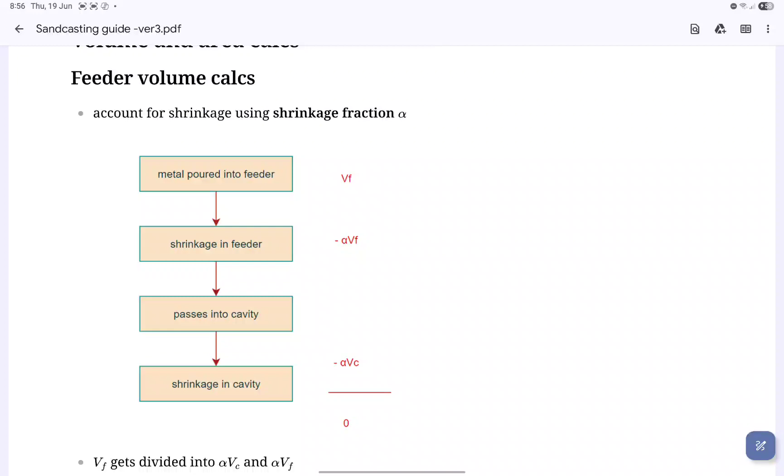What we have is that the entirety of our feeder volume is being divided into two things, right? The amount that is wasted here is by being shrunk. That volume we can never get back, okay? That's just life. That's the way it is. But the rest will be whatever is left over here times the shrinkage, so minus alpha VC.

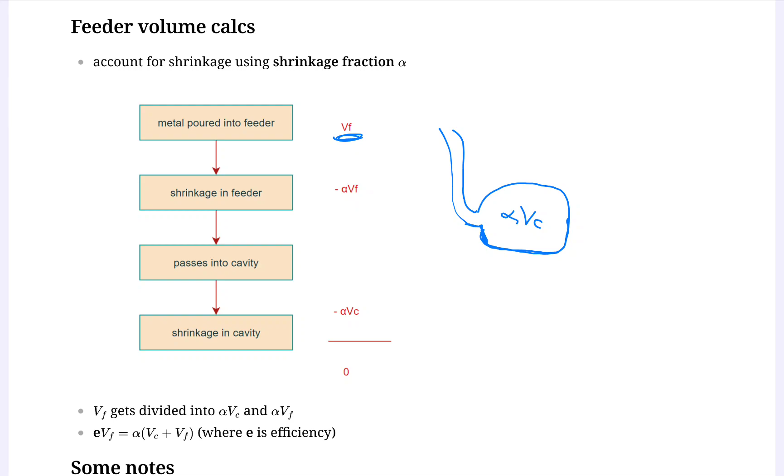It's not entirely important that this process is something you memorize, okay? All you need to know is that VF is equal to alpha VF plus alpha VC. The volume of the feeder is equal to alpha, because it's the same here and here, times VC plus VF. But also we must know that feeders have a certain efficiency associated with them, and it's called E. So EVF is equal to alpha VF plus alpha VC.

This is the only equation you basically need to know in terms of volume, okay? And this, you know, is always 3.16. These volumes are going to be part of your other calculations where you're working with volumes, like for example with the modulus, where we have the volume over area type thing.

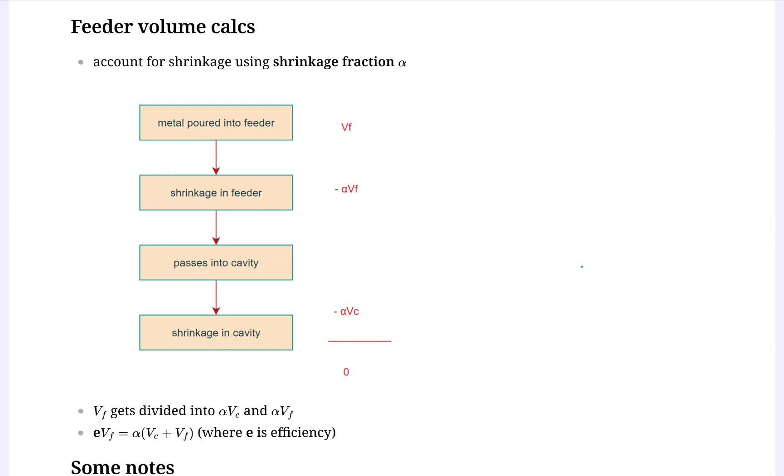We're going to have a lot of equations, and you're going to solve the unknowns, and they will give you the efficiency, or you'll calculate the efficiency, but you'll be given something. It's not something you just have to pull out of the air. And yeah, this is the extent of the equations they can ask you. I'm just going to go down to see that question about efficiency and volumes and things. I don't go into a lot of other detail, but we do have some more notes about volume and area. So I just want to say these things.

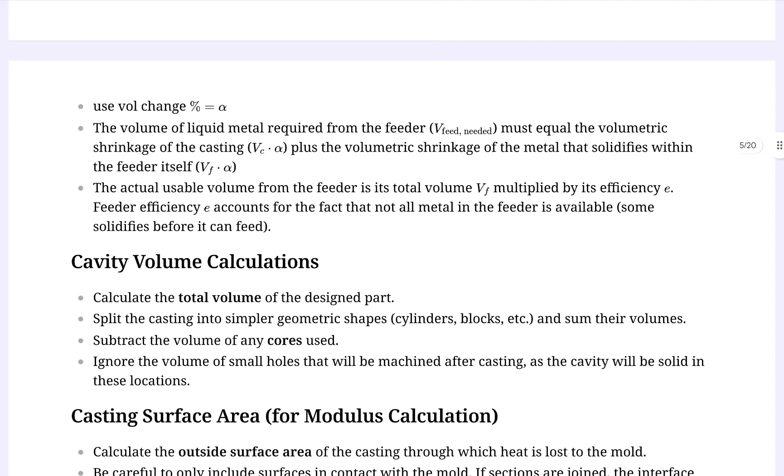I just reiterated here that the percentage change in volume is alpha, which is 3.16 generally. The volume, VF, is equal to VC alpha plus VF alpha, but we already said that. It's just typed out. The volumetric shrinking of the casting plus the volumetric shrinkage of the metal, okay? The actual usable volume is this times efficiency. So this is things we've already said. Okay.

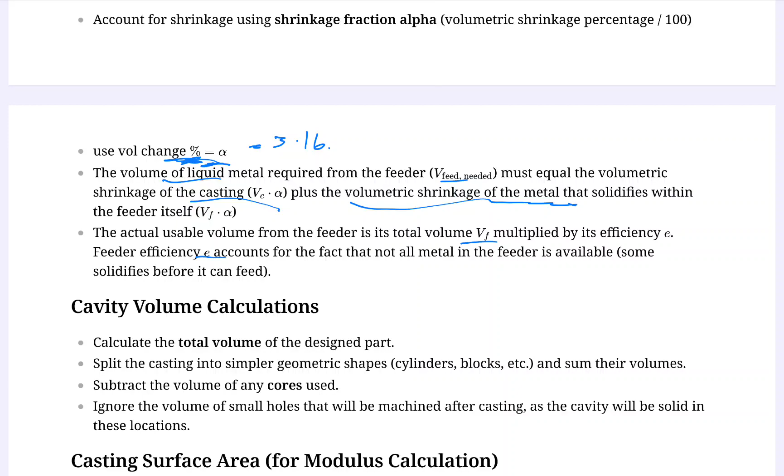We need to actually think about what the volume is. And you have this big shape full of little things. You literally just have to do calculations of the individual shapes and add them together for the volumes and the areas. So it might be worth just making sure what the formula is for like a cylinder or a rectangle, but I mean, it's not that hard.

But if you're anything like me in an exam, I once spent 20 minutes trying to remember what the formula, I think, for the area of a triangle was. This was like in second year, because you don't think about it much, man. You think about Reynolds number and entropy. You never think about triangles. It happens to the best of us, man. Just always remember to study the dumb things beforehand.

So this is in general little tips. The total volume is something you have to calculate. It's easy to split it into simpler shapes, and you subtract the volume of any cores used, because obviously that's not going to be used up by the metal at all. Ignore the volume of small holes because they're going to be drilled in afterwards. So obviously the amount of metal you need is still going to fill the place where that hole is going to be. You're going to drill in the hole afterwards.

For the surface area for those modulus calculations, where M is equal to V over A, the area that we're thinking of here is the casting surface area where heat is lost to the mold, okay?

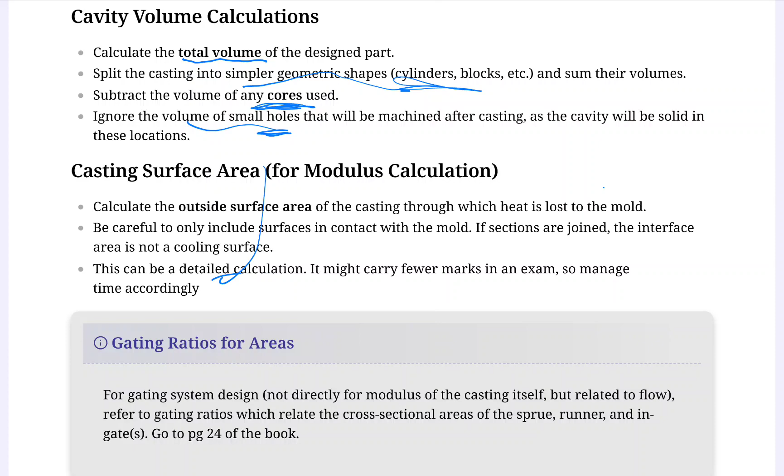This is the thing I just want to note. I made a note for myself that it usually doesn't count a huge amount of marks, and it takes so long because sometimes it's a really complicated shape. So just prioritize writing all your calculations and maybe the entire method and everything you need to do, and then leave this for last, because it's going to take a lot of time, and for 5 marks it's not worth it, where you could actually get a good amount of work in for a different question.

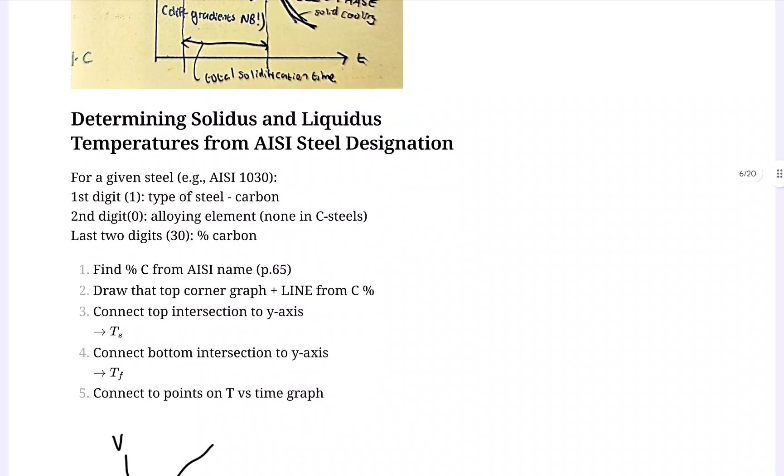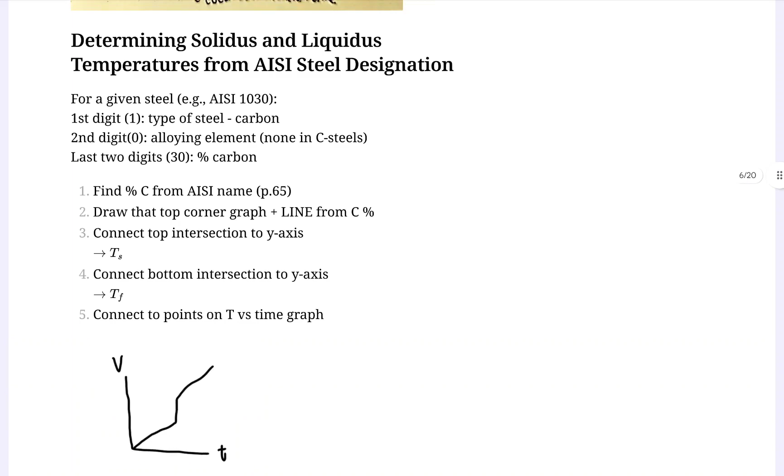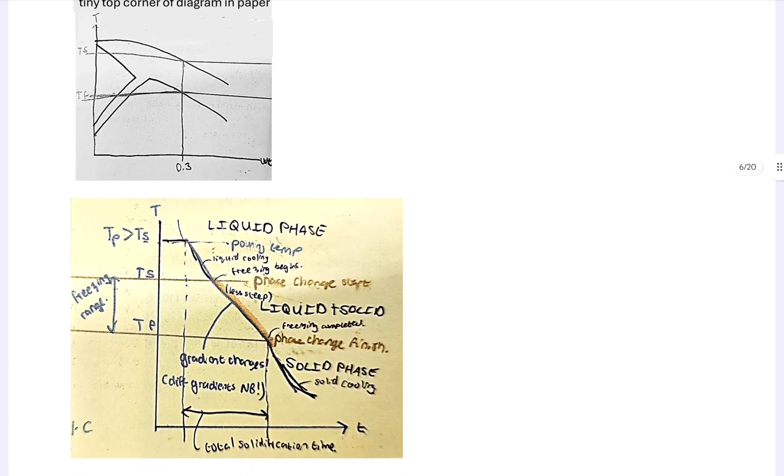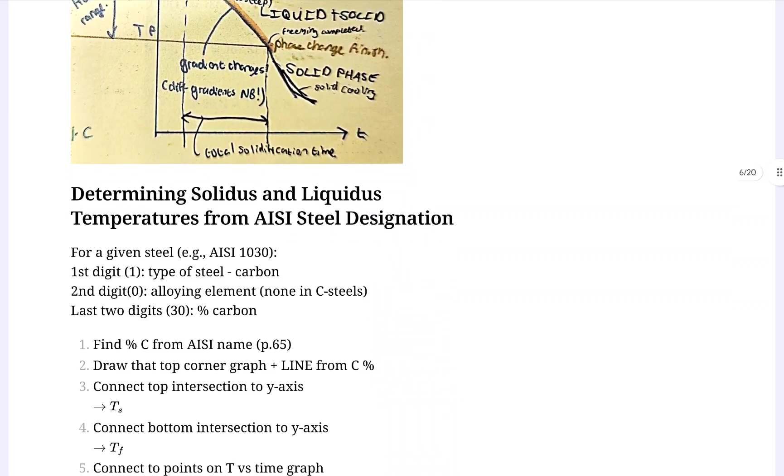You also have a section for phase diagrams and temperature determination. I'm not going to go into this in detail because this is material science work. I'd recommend watching a video on it. So literally just go on YouTube and do a little bit of revision on how to do these. All I can say is when you do need to draw these diagrams, the top tiny little corner of the diagram in the paper is the shape that you want to aim for, which is this shape. So that's the shape you're going to try to copy.

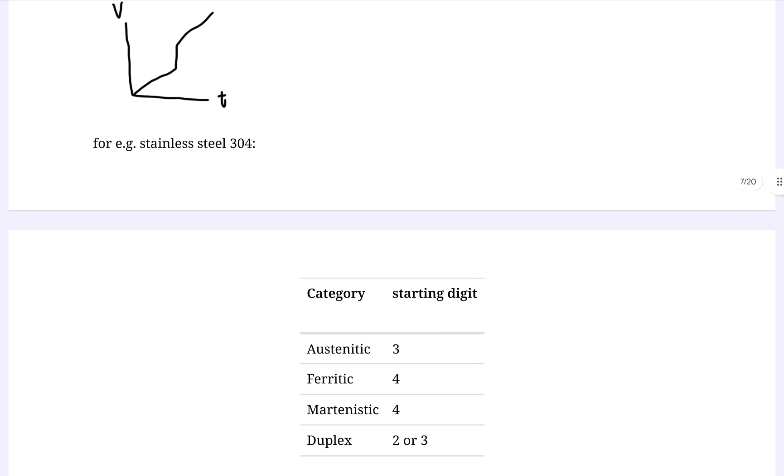So yeah, I just made these little notes, and phase fractions and the general naming convention is here because these are things that I tended to not remember or needed reminders of in the exam. But yeah, that is basically all the calculations needed. Just want to show you some of the calculations here. Here you can see literally what we just did.

This is efficiency times the feeder volume is equal to alpha, which is 3.16%. So that means it's 3.16 divided by 100. Remember, I've been saying 3.16. It's 3.16 divided by 100 because it is 3.16%. Really important. NB, NB, NB. If there's one thing you need to remember, divide by 100. Okay? Otherwise it's going to be weird values. So yeah, there's literally the calculation we did.

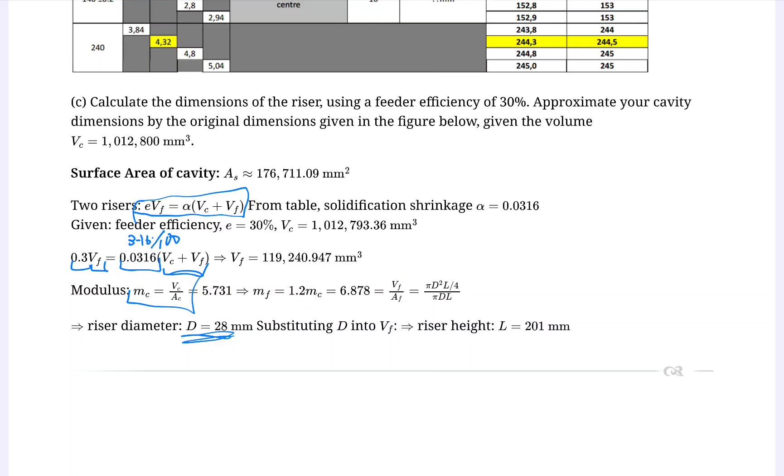As you can see here, in all of these calculation questions, it is literally just writing our equations, everything we know. Here's the modulus. Here's the 1.2 thing. Here's the volume over area. And then finding the diameter. It's always the same method. If you practice 1 or 2 of these, you've got the method down. You'll ace the sand casting part.